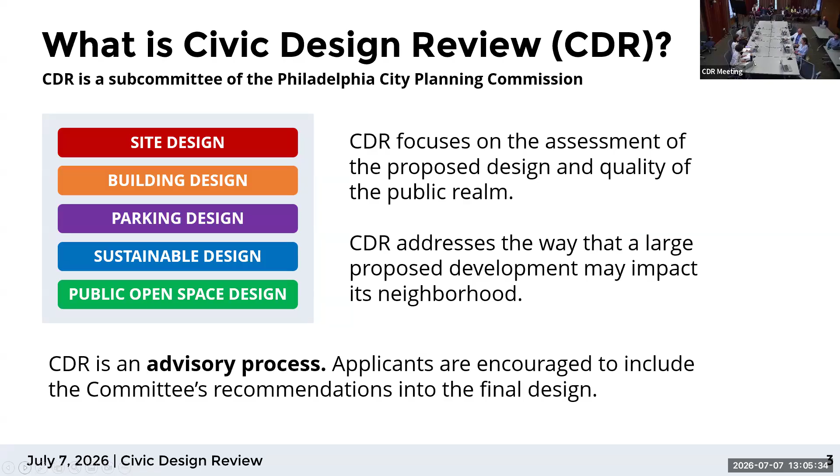The Civic Design Review Committee encourages and values participation during its meetings. Members of the public will have the opportunity to comment on agenda items during the meeting. Questions and comments will be heard during the public comment period, which will be opened and closed by the CDR committee chairperson. Public comments should focus on design-related issues only. When addressing the committee, please speak clearly and identify yourself by name and, if applicable, affiliation. A 2-minute time limit for public comments will be enforced by the committee chair and the meeting host.

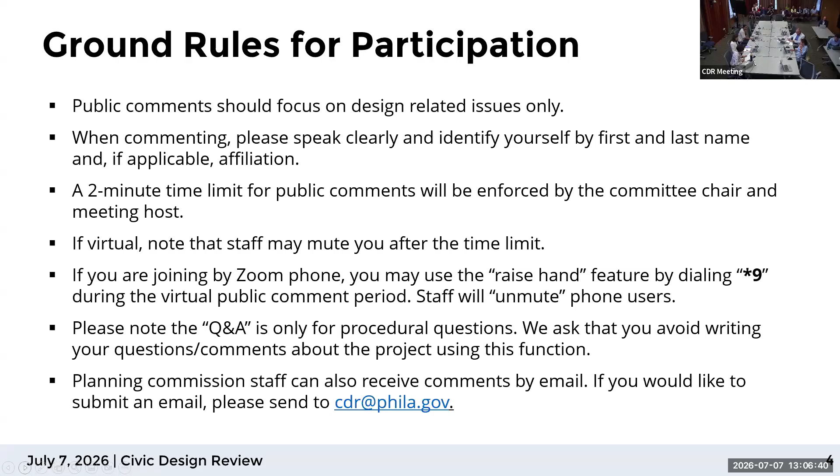If virtual, please use the raise hand function in the Zoom application and wait to be unmuted by the meeting host. If you're joining by Zoom phone, you may use the raise hand function by dialing *9 during the public comment period. Staff will unmute phone users. Please note that Q&A is for procedural questions only, and we ask that you avoid writing your questions and comments related to the projects using this function. Planning Commission staff can also receive comments by email. If you would like to submit an email, please send it to cdr@phila.gov.

First reviews will start with an applicant's design professional presentation limited to 10 minutes, followed by PCPC staff summary. Second reviews will start with PCPC staff analysis before the applicant's design professional presentation, limited to 5 minutes. Staff analysis will be based on the requirements of the zoning code and planning commission regulations, which will focus on site design, building design, parking design, sustainable design, and if applicable, public open space design.

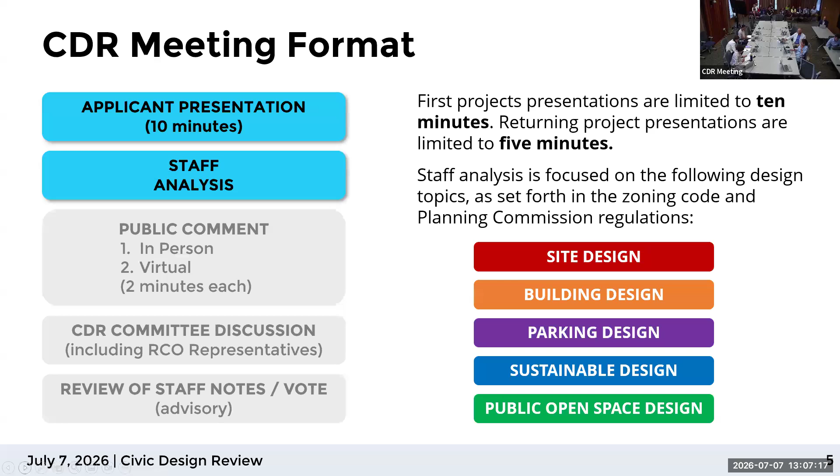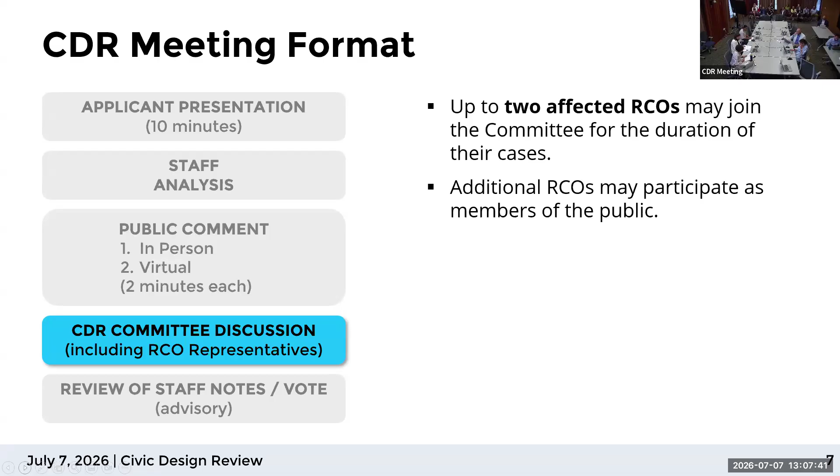Public comment will follow. Please do not restate the comments of your neighbors, and comments submitted in advance of the meeting will have been given to the committee and do not need to be read aloud. CDR committee discussion will follow the public comment period. Up to 2 affected RCOs may join the committee for the duration of their cases, and additional RCOs may participate as members of the public.

After the discussion, the staff will present notes taken during the meeting. The staff notes are for summary purposes only and not a word-for-word record of the conversation. The CDR committee will vote to adopt staff notes by unanimous consent and will also vote by roll call on whether or not a project needs to return for a second review. For roll call vote, I will ask the commissioners for their votes individually at the end of each agenda item.

The chair will now call the meeting to order and announce a quorum. Good afternoon, everyone. I am CDR Chair Jimena Vale. The Department of Licenses and Inspections has informed the City Planning Commission of 3 cases, 2 of which are coming for the first time. Cases may be heard more than one time. The committee may ask an applicant to return if, after discussion, significant issues are left unresolved.

Committee members, I'm going to call you one at a time. Please acknowledge your presence. Sarah Asheimer. I'm here. Clarissa Redding. Hello, I can hear you. I'm glad. Dan Garopalo. Present, thank you. Let's see. I think that is us for today. Yeah, thank you, I think. Mina? Yep.

And so we're going to begin with our first case, and that's 1527-47 Callowhill Street.

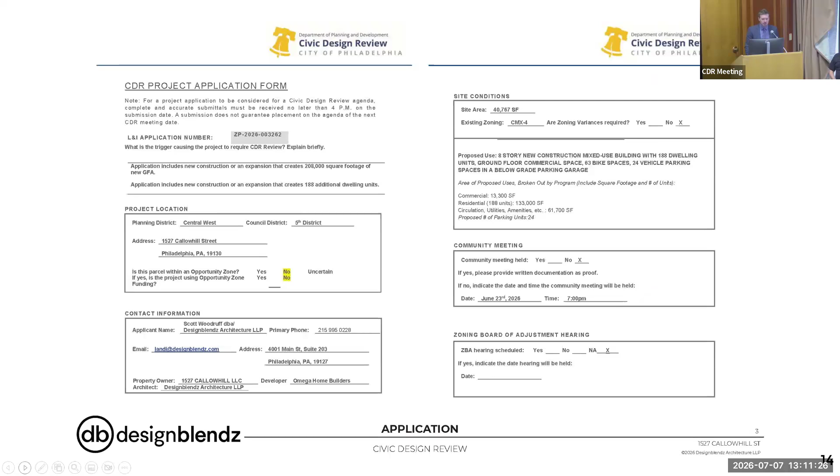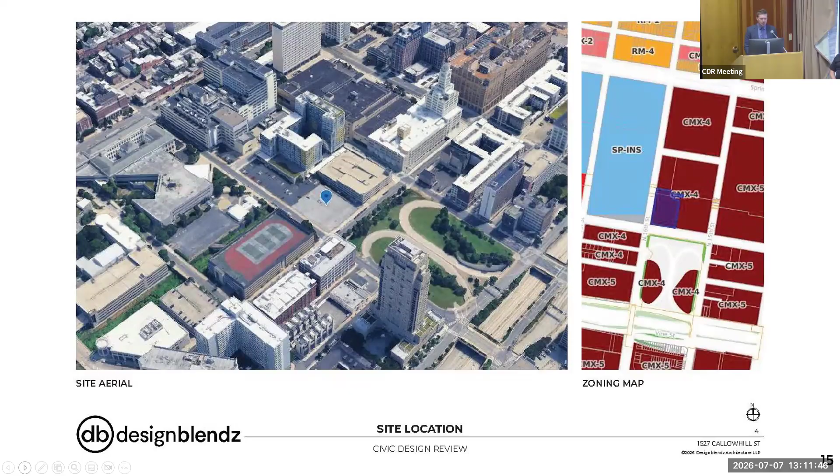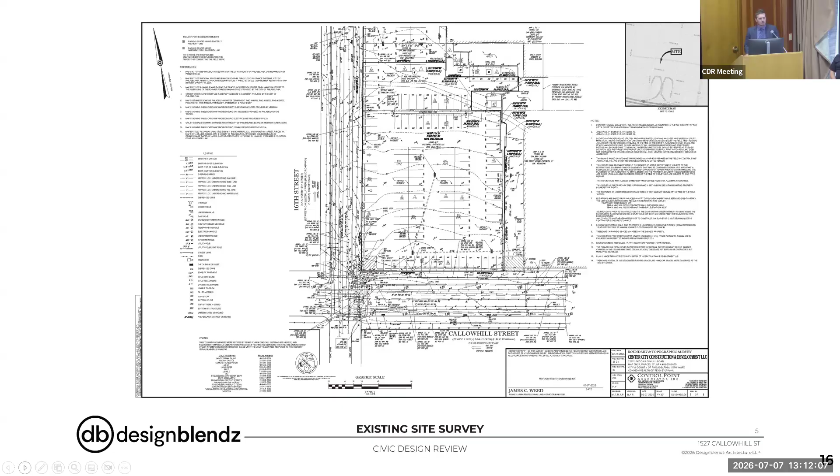Joe kind of walked through the program, so I'm not going to go over that. The site is an existing parking lot right north of the 676 turnaround, at 16th and Callowhill Street. There are 2 parking garages flanking either side of that, as well as a surface lot to the north side. Main thing I want to touch on here is the existing topography — we have about a 6 to 7 foot increase in slope going up 16th Street from Callowhill, which is fairly flat. And then we have the remnants of the old rail line that's depressed on the northern side of the site, cutting through.

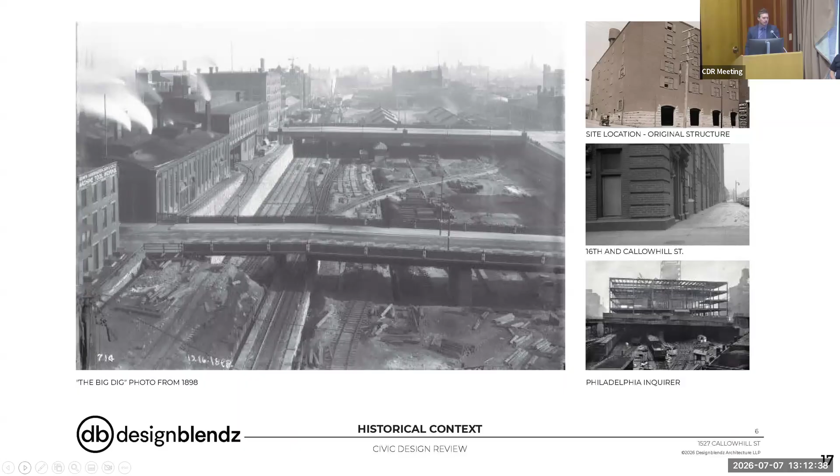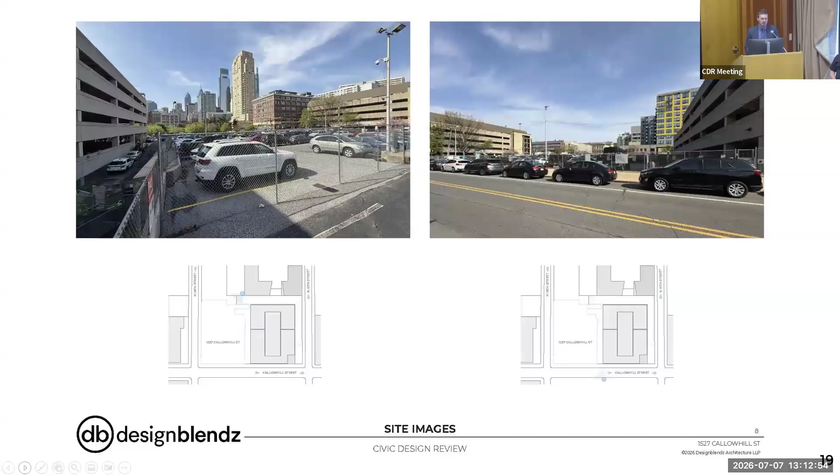Let's look at existing photos. You can see there's a newer multifamily building to the north side. Like I said, parking garages are seen flanking both sides of the site currently on Callowhill. And the Inquirer building can be seen in the background there on Broad Street.

Looking at the urban context and really understanding the figure ground of this area, there's really a giant void at this intersection where the site is, creating an unfriendly pedestrian intersection and urban experience. So it's important for us to hold the ground at that area, really push the facade, and create some sort of activation.

Looking at circulation, the main two accesses are Spring Garden and 676/Vine Street, running east to west, and Broad Street running north-south. 16th and 15th do get a fair amount of foot traffic and bike traffic. Community college has a large amount of driver traffic, and those parking garages have a lot of vehicles with people going to work around them. So there is a fair amount of activation that comes through this site — there's just nothing there to happen at the moment.

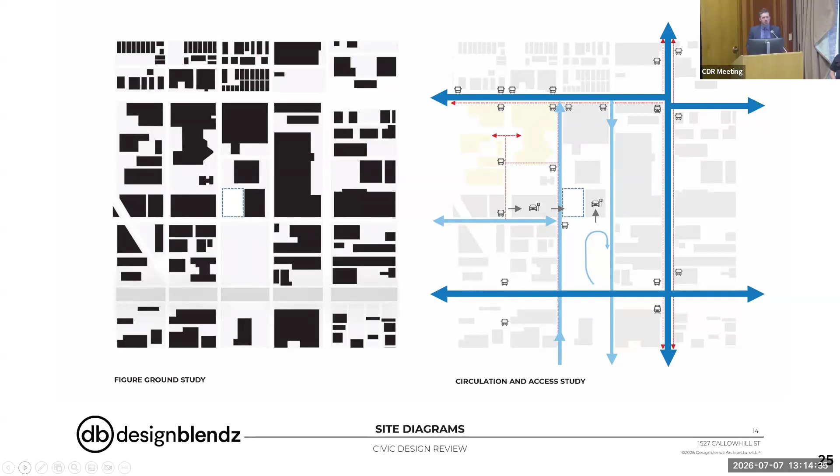When we started looking at form, the main driver was maintaining that urban fabric along the street frontages. We created some circulation around the building to the backside and the side there, cut a light and air void for the program to be relatable, and then pulled back one side to create a little bit more outdoor amenity and garden space for the residential program.

In developing this facade, it was important for us to create a pedestrian scale that was very walkable along the street frontages, creating a 3-story podium type structure relatable to human scale, and a structured rhythm that harmonizes with the existing industrial balance and facades in the area. We added a large amount of glazing at the bottom where the main commercial program is, relating back to more punched openings where the residential is above.

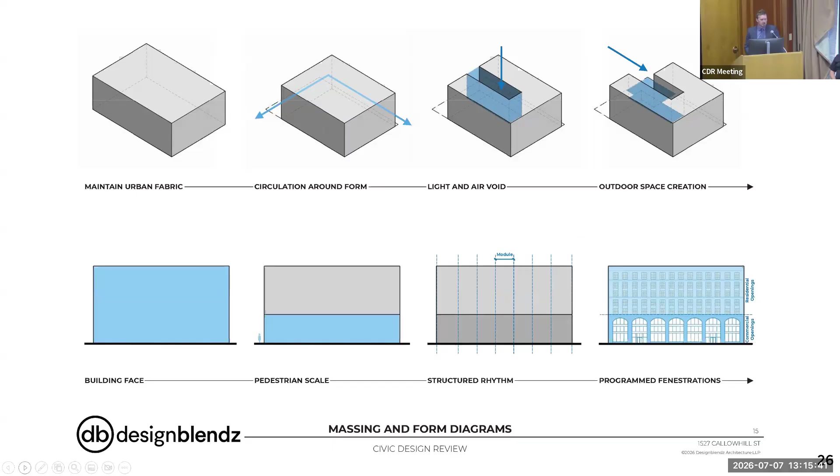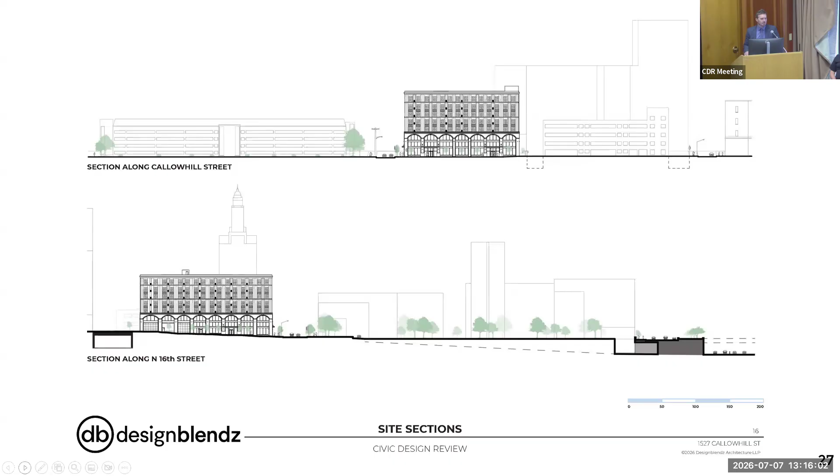Site sections - Callowhill is very flat, and you can see relationships to the garages popped up above those a bit. Up 16th Street, we have that ground plane that comes up, and the arch rhythm molds into the site quite well as it increases in grade there.

On the first floor, large commercial area - we tried to maximize this to the extent that we could. Commercial along Callowhill turning onto 16th Street will be double height space, which we'll look at in a second. Focus entries along Callowhill Street, and the resident lobby off of 16th, about halfway up.

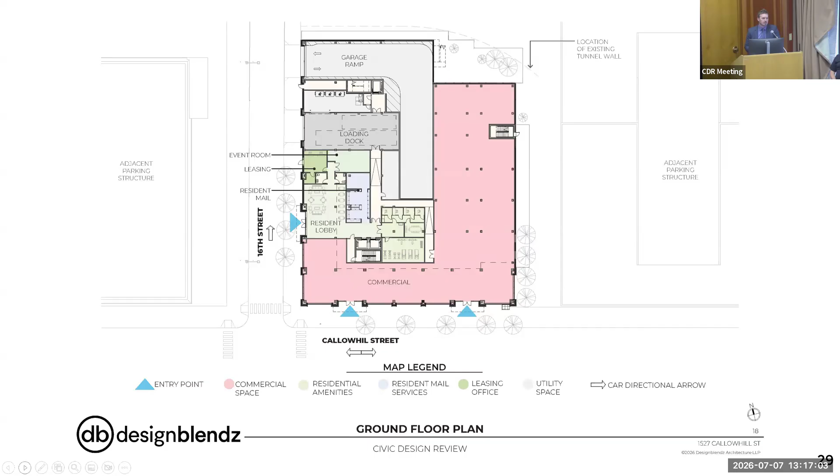All vehicular traffic was pushed to the north of the site, furthest away from the intersection. The top garage ramp goes to a subterranean basement, with a loading dock right south of it, direct access to a trash room for residents, and a back of house corridor for commercial, which they can also use as loading.

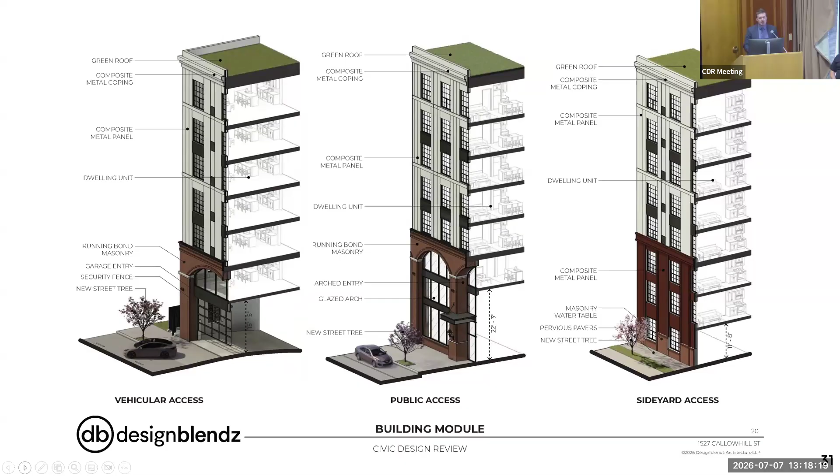It was really important for us to try and maintain as much flexibility as possible for that commercial tenant, whoever they may be, coming into the space.

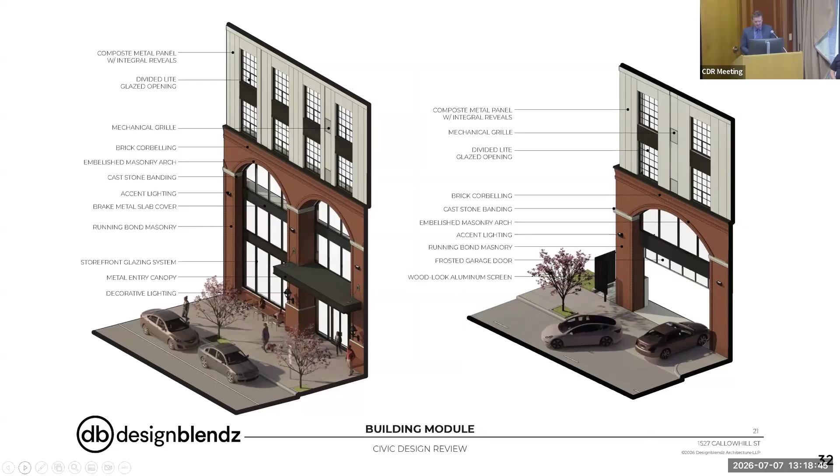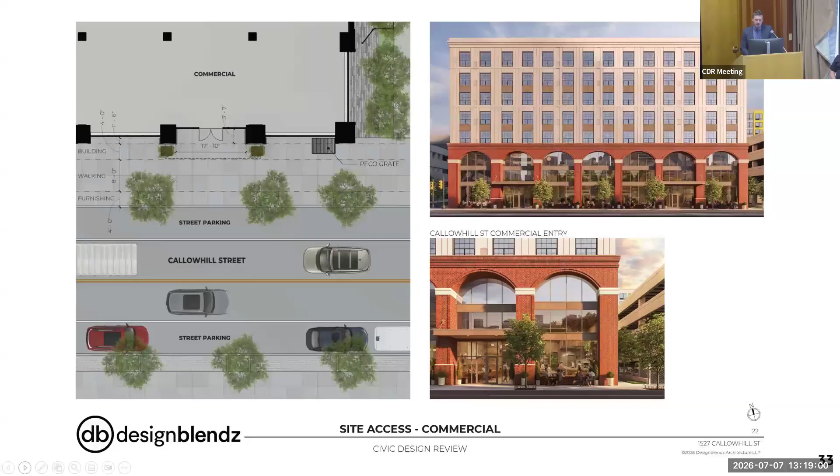One thing I'll mention here is the insets are 3'7" going into the entryways, still 1'6" at the other ones, again trying to allow the pedestrian to experience the building, pulling them into the building, if you will.

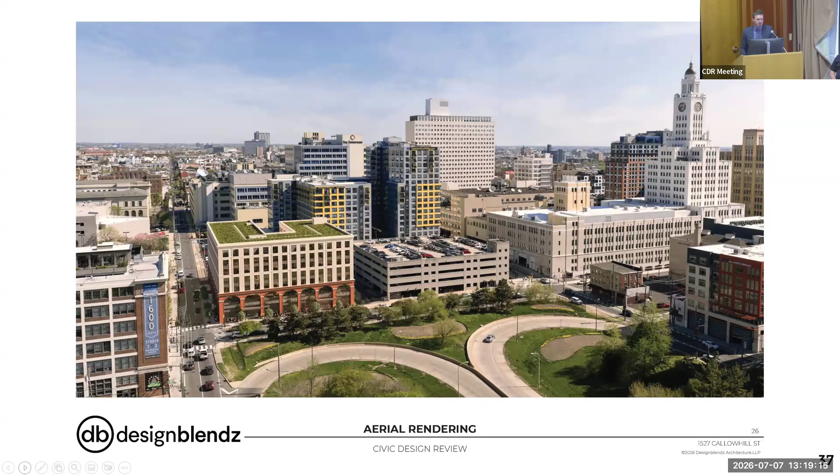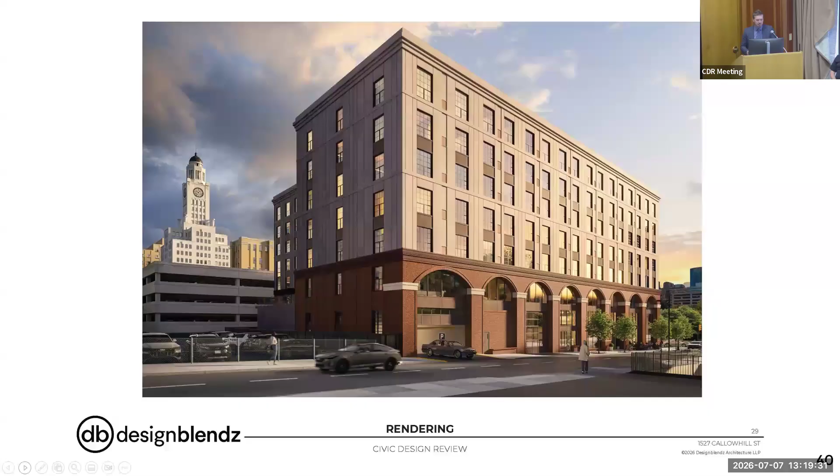Looking at materials of the building, the bottom 3 floors are brick articulated arches, with the top floor being metal panel, more of an off-white with a black infill. This tried to harmonize with the existing context - the Inquirer building and some of the other precast buildings in the area - so we play off those colors, both from a historical context and the existing surroundings. Around the middle of the building, the brick will transition to a red metal panel, still keeping the same idea as the front of the building, but with a different materiality over the parking garage and on the interior.

For the streetscape, we can go through the landscaping, but it's mainly street trees. We have a few trees towards the rear of the property, but most of the site is covered with green roof, which provides most of the infiltration given the building is mainly covered. I'll leave it right there.

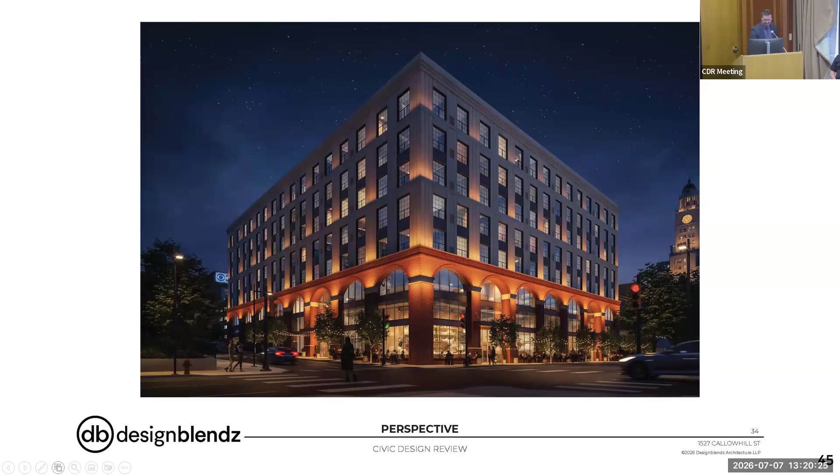Good afternoon. My name is Eliza Bauer. I'm with the Planning Commission, and I'm going to give the project overview.

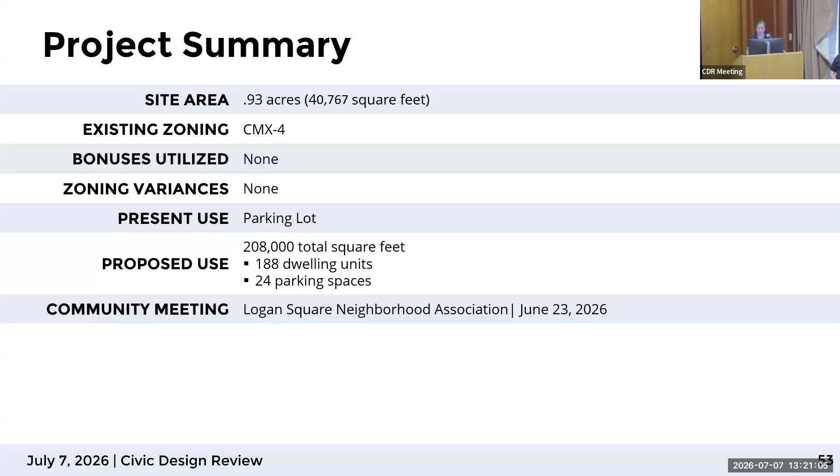The site area is a little under 1 acre. It's CMX 4. There's no bonuses being utilized or variances. The present use is a parking lot. It's a bit over 200,000 square feet, 188 dwelling units, 24 parking spaces, and there was a community meeting with the Logan Square Neighborhood Association on June 23rd.

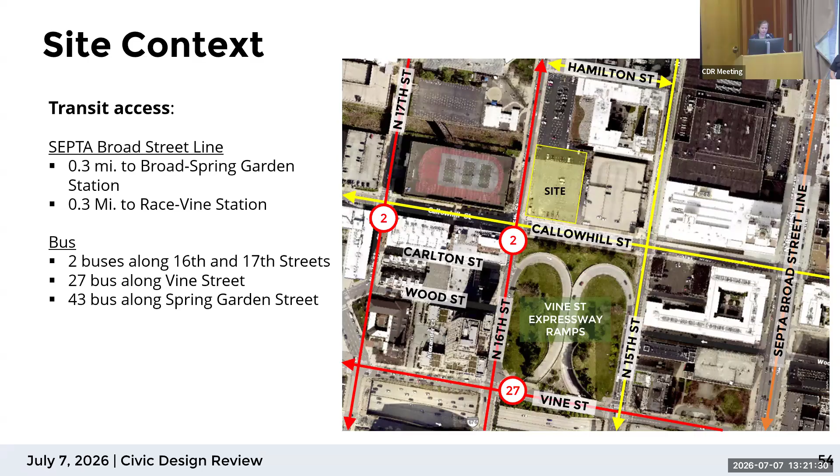So just a little more context about the site. It is pretty close to the SEPTA line, under half a mile, both the Spring Garden and the Race and Vine stations. There are a number of buses that go along the edges of the site, and it is very close to the Community College of Philadelphia.

Another thing we wanted to point out was the future rail park that will go into this cut area right north of the site. We just wanted to mention that we would like to see some connection between this site and the future rail park, or ways that the site could acknowledge that potential park.

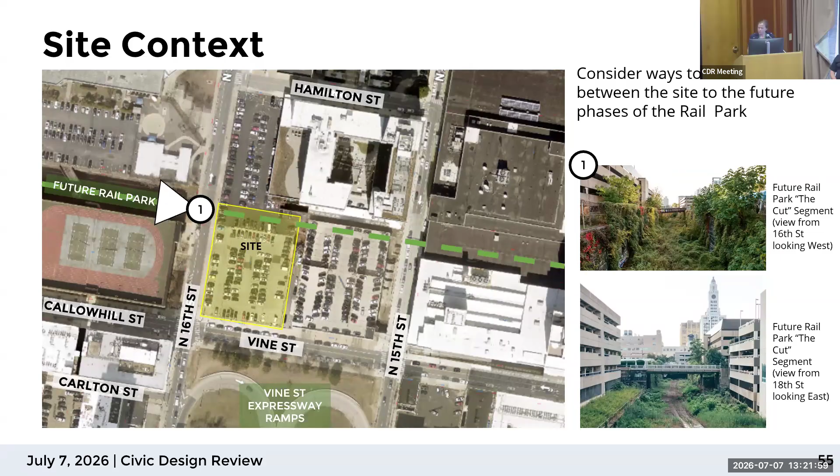For site design, staff appreciates the addition of street trees, outdoor bike racks, and distinct entrances for commercial and residential activities with associated marquees. We would like them to consider tree trenches with additional plantings to soften that streetscape a little more, especially along busier roads like Callowhill.

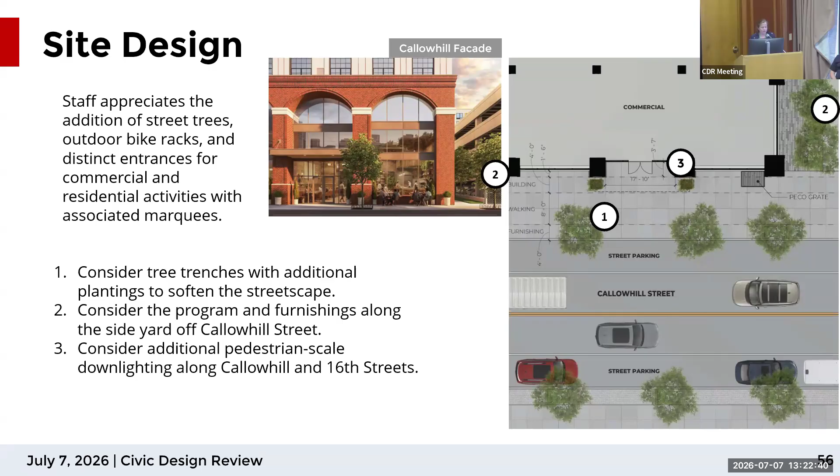Consider program and furnishing along the side yards of Callowhill. As you can see with the number 2 spot, there's kind of this alleyway, so we don't want it to become a trash or dog waste area. Consider additional pedestrian scale downlighting along Callowhill and 16th Street.

For the building design, staff appreciates the facade articulation with large windows, ground transparency, the entrance with marquees, and a mix of studio, 1, 2, and 3 bedroom units. Consider higher quality materials instead of the metal panel to ensure that proposed color is reflected accurately in renderings.

Based on the sample, it looks a lot whiter than the rendering is showing. And I know that you mentioned it's slightly off-white, but we just want to make sure it's consistent. Consider larger windows on the rear facade facing north.

For the parking design, staff appreciates the below-grade parking with one-way circulation and two-way driveway, and the interior loading zones off 16th Street.

But consider adding more loading zones on 16th and Callowhill for drop off and pickup and Amazon and all those types of delivery services.

Consider additional electric vehicle spaces and locate the charging spaces, and whether they'll be charger ready or have them already installed. Consider reducing parking to improve the vehicular circulation at the dead ends. It seems a little tight with a 3-point turn.

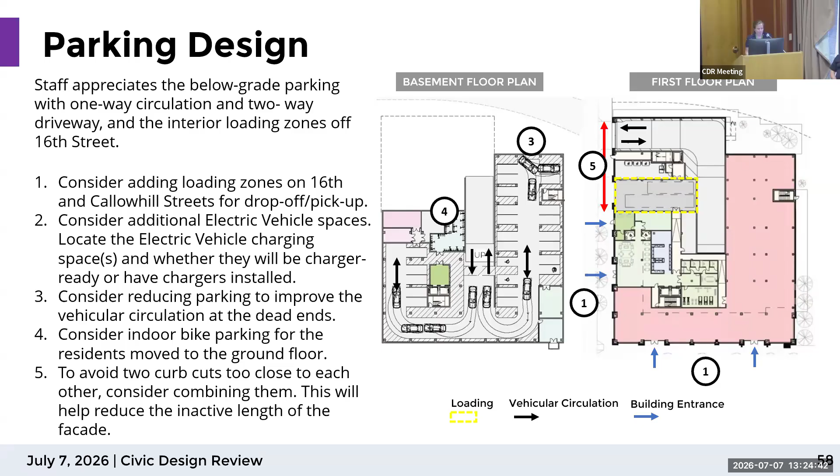You have the loading zone and the driveway right next to each other. Consider combining them, so this will reduce the inactive length of the facade.

For the sustainable design, add at least one additional EV parking space and identify where they are. Staff appreciates the intent to relocate the existing Indego bike station from 16th Street and encourages it to be reinstalled on site. Staff also appreciates the occupiable green roof, but consider adding some shading in that area. And that's it from us.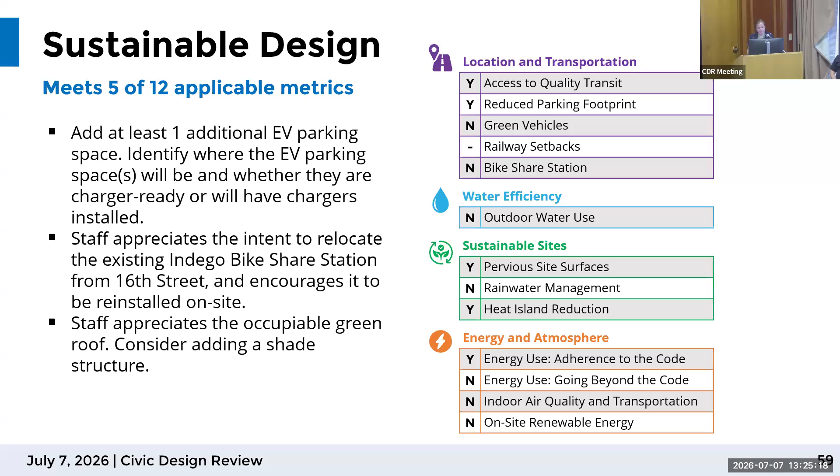Find a pretty picture to land on. There we go. Thanks very much, Eliza.

Do we have any comments from the public? I don't see any hands raised at this time. None here. No one here.

Committee members, any comments or questions? I think that this is a great project, and I wholeheartedly agree with all of your comments and recommendations. So, that's where I am.

I think kudos to everyone here. I'm glad you mentioned the future Rail Park. Hopefully that is a wild success and something amazing for Philadelphia. Maybe an extra door from the commercial space back onto that, if that's some signature restaurant with a patio on the rail park, that would be awesome.

But really nothing additional to add. I did pick up on the color question too, that bone white versus what the renderings show. What the renderings show looks fantastic, but that was a concern I picked up on too, though Eliza already mentioned it.

That's it. Great, thanks Sarah. Anyone else? I'll second that. I had the same thoughts. I'm very familiar with this site and still park there very often, but I think this area would benefit from something like this, which has more of an elevated feel than some of the other development in that area.

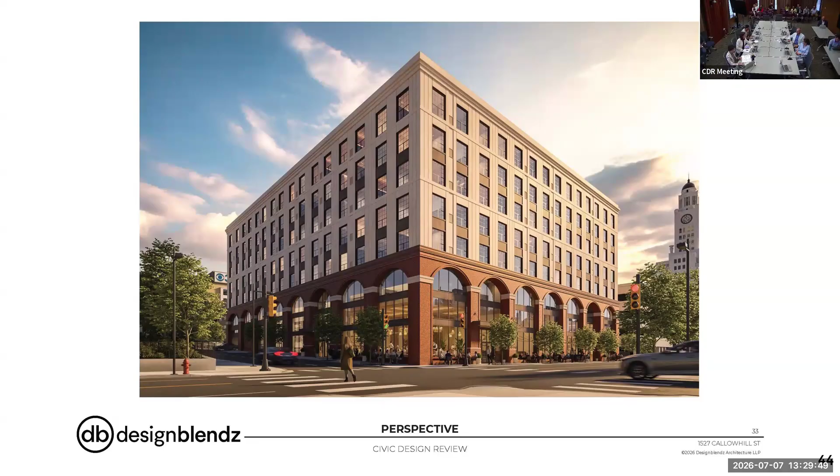Okay, I think we can review notes. Eliza, is that you? Who's got notes? Yep, okay, great, thank you.

Okay, very good. So our notes: this is a great project, improvement compared to some surrounding developments. Consider a door to the future rail park and making that connection, consider it as an amenity to the building. There are concerns with the bone white not being reflected in the rendering. In other words, we don't want to see the bone white. We'd like to see something that's more like what's reflected in the renderings, a little bit warmer and contextual.

The easiest time to add EV is now, so please consider that. And create some shade on the street for the future commercial spaces. And we are in agreement with all of the staff comments, and congratulations on a great project. Any corrections? Just to focus on building envelope issues, for energy.

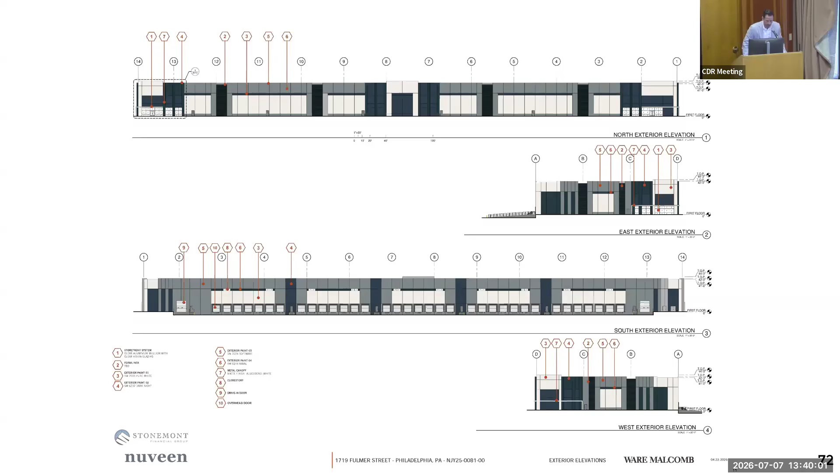The south side of the elevation has the dock doors, the loading doors, drive-in ramps, utility room, access doors, and sporadic fire department access doors as required by fire code. The south side also includes clerestory windows to provide daylight into the working area, the loading bay of the warehouse.

This gets into a little more detail on the materials of the building. The proposed perimeter would be precast insulated structural concrete panels with steel HSS tube columns and joist girders and steel joists holding up the roof structure. The panels would have a smooth finish with reveals, which are basically shadow lines cast into the panels, with a paint scheme as you see here on the elevations.

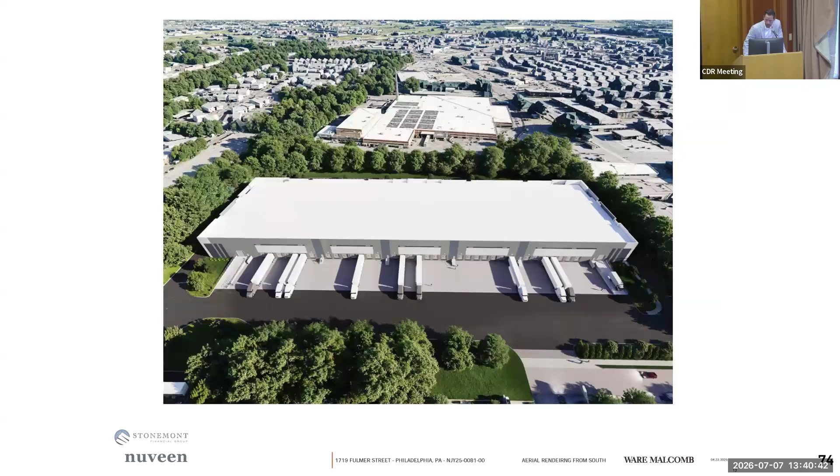The paint would be a medium texture coat paint. There's a few renderings here to wrap up the presentation.

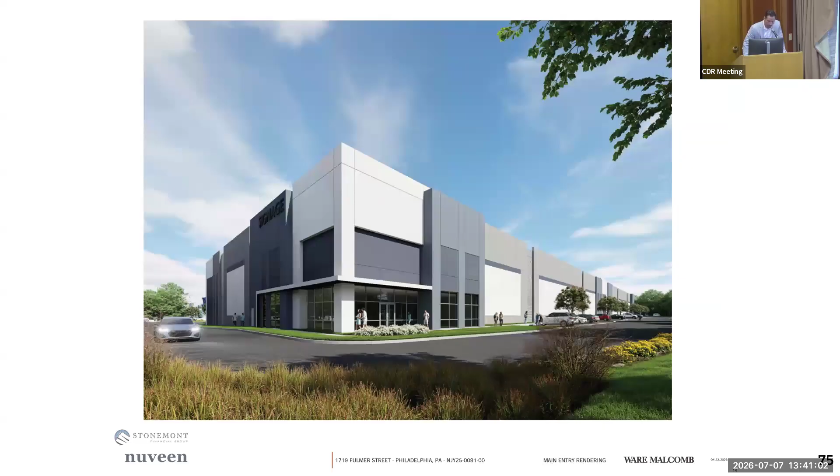This one will be taken above Fulmer Street, looking at the truck court and seeing the large industrial building beyond. To the left side, there's the rail line. I believe that's the West Trenton rail that goes through that side of the property, or along that side of the property.

This would be the northeast corner of the building, the office location. We tried to create shadow lines with recesses and pop-outs of the building's planes with the concrete panels, and accentuate the office entry areas.

This is the opposite corner where we've slid the office location and the windows down slightly down the facade to maintain the 3-hour rated fire separation.

This is a view from Fulmer Street looking in at the primary passenger auto entrance, and an aerial view from the northeast looking toward the building to show the front elevation and the neighborhood adjacent.

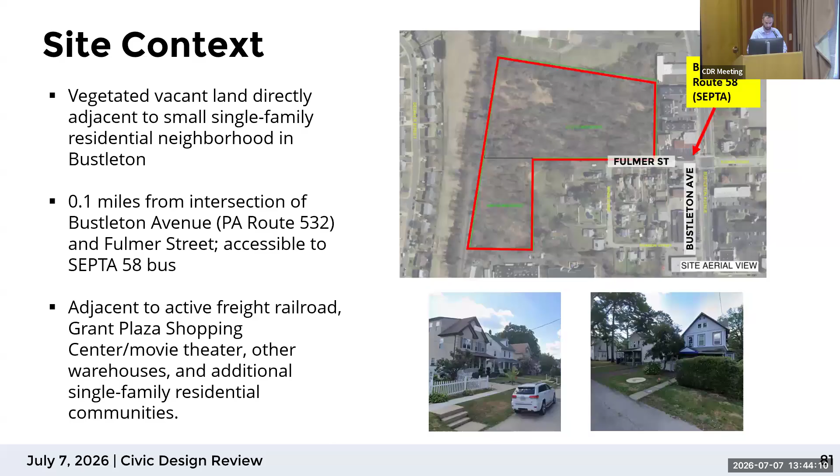For site design concerns, the Planning Commission wants to make sure the ingress and egress of the facility are evaluated. We want to ensure direct connection to Bustleton Avenue. We also recommend additional landscape buffer areas between the residential properties and the site's surface parking lot. We encourage more paths for pedestrian circulation through the parking lot, as well as around the water retention area, and potentially as far as Bustleton Avenue. Ultimately, this would improve safety and activate space throughout the entire site.

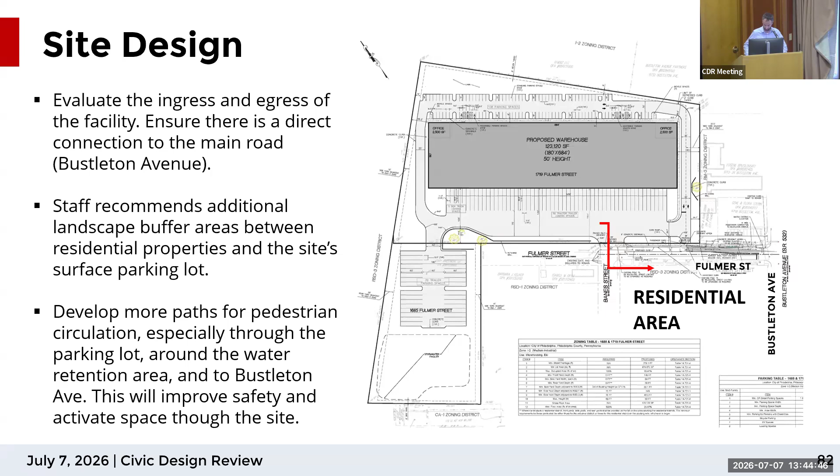As far as building design, we encourage adding transparency where possible and making the main building entrance clearer, perhaps through painting it a different color. In terms of parking design, we encourage reducing the amount of parking and adding more vegetation to reduce the heat island effect, as well as adding parking for EVs.

In terms of sustainable design, the proposal meets 5 of the 12 applicable metrics. We encourage that the project add solar panels as well as conserve as many trees as possible.

And now we'll make our way for the public comment period.

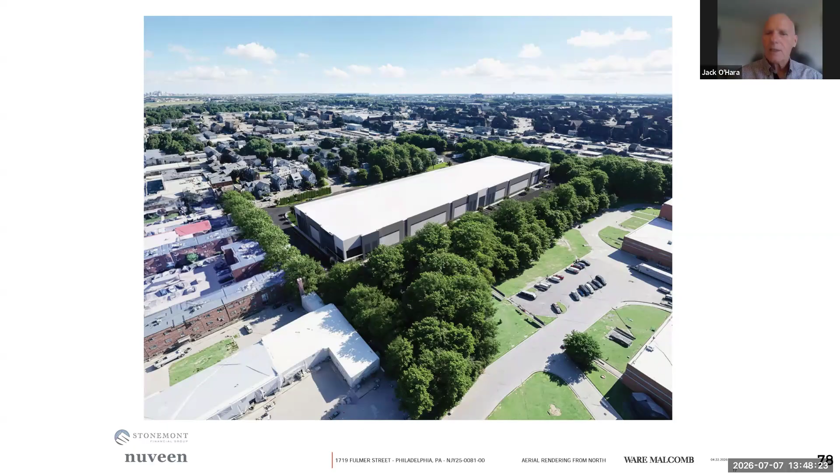And one of the recommendations that we sent down was that a second entrance could be made further down Fulmer. So a lot of the truck activity would occur inside the parcel and not on Fulmer in front of these 6 residential homes. So I don't know if I'm clear, but to take the traffic further down Fulmer, turn right into the parcel and let the trucks do their business, turning all inside the property and not outside the property. Again, for safety reasons, headlights and windows and things like that. We're trying to minimize the impact of this warehouse in this residential neighborhood.

Other than that, I know all these truck turning radius issues are going to be addressed. The plan does mention some very large trucks are expected there, and I'd like to confirm and make sure that does occur. But that's all I have. Thank you, thank you very much.

I know we also have Council District Representative Alice Udovich. Alice, would you like to speak? Hello everyone, Alice Udovich on behalf of Councilman Brian O'Neill. I attended that meeting that Jack mentioned, and I agree with all of his concerns as well, with as much buffering as possible to protect that residential neighborhood. Thank you.

Thank you. I did read the comments that came through from that meeting, and felt that they're really spot on, really good comments that offer good recommendations. That meeting having taken place at the end of May, would you be able to speak about why some of these comments have not been incorporated into the site, specifically a major change, the idea of flipping the development so that the trucks would be facing another warehouse rather than the residential. And then the comment that was just mentioned of moving the driveway, or potentially adding a second driveway.

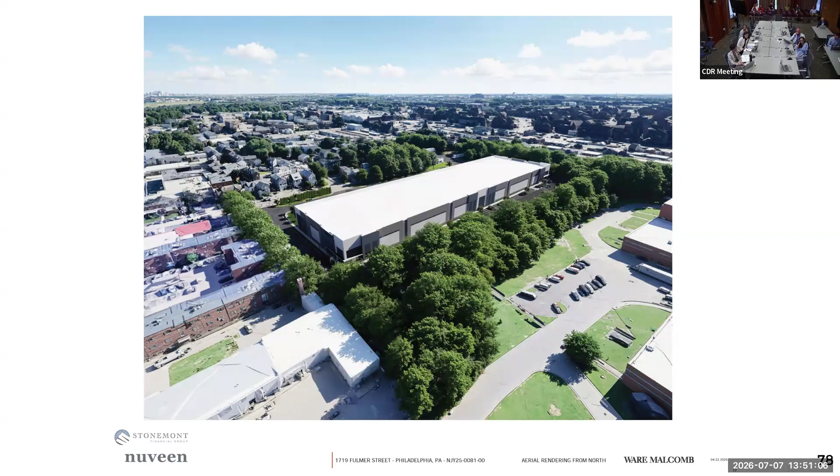I'm Brian Danahy, the developer for the project. Do you mind going back to the existing conditions page? This shows why we've chosen the layout we have.

The site slopes significantly from north to south. If you go to the survey before this, you can see it slopes significantly.

What we've done is put it as far away from the residence as possible. If you flip the building, there's about an additional 10 feet that raises that building, and it's slammed up against the property line, so those residents looking at the warehouse would be immediately positioned right on top of it with an additional 10 feet in elevation.

It also adds complexity in how trucks and cars are delineated on the property. So from a safety perspective and for minimal impact, we chose to flip it to the other side, using the existing grades to bury that warehouse as low as possible, and then use landscaping and features we've designed to help block that.

We've over-landscaped per code. We're open to suggestions on how to continue landscaping there, but we felt that was the best way to use the existing conditions and minimize the impact.

From a truck and logistics standpoint, it also matches the existing approvals that were in place. The 3-building development that was approved, which did not go through CDR, had the same orientation. The goal was to delineate trucks and cars as they go onto the property, which is why the two access points were put in place.

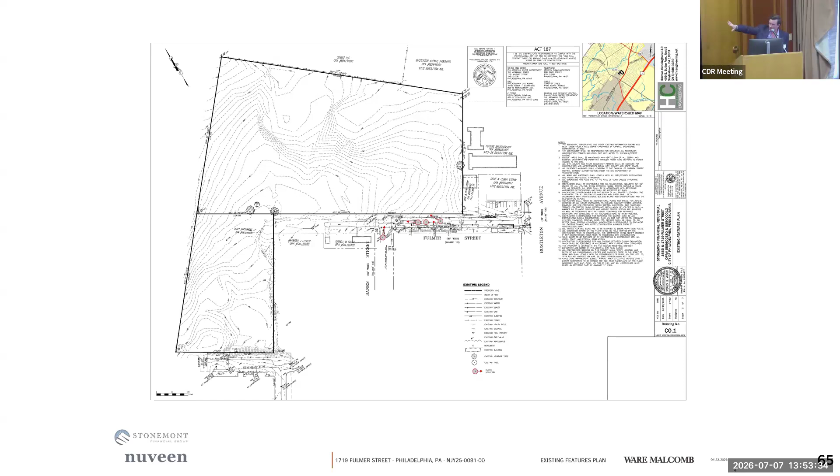Stormwater and truck parking would bring into play the car and truck crossover, which becomes an issue from a safety standpoint. Page 68.

Yeah, I guess this one shows it. So could you articulate that again?

So if you were to flip the building down, look at the bottom left, that's the truck parking lot. If you flip the building, the trucks exiting the property would have to cross where the pedestrians and cars are located.

So what we've done is put all truck traffic on the same side of the building. We've put the building as far north as possible to sink it, and put all the cars on the north and east end of the building, so it's perfectly delineated and flows without any crossover from a logistics and access standpoint.

Rob, if you're on with our civil team, do you want to explain any details that I'm missing there?

You can unmute now, can you hear me? We can, yeah. Hi, Rob Cunningham with Holmes Cunningham Engineering.

We looked into it, so Brian was a little mistaken. It's actually more like 15 feet of fall across the site. But when you flip the parking lot and provide a truck court or loading docks on the north side, it pushes the building about 65 feet closer to Fulmer Street than it sits today.

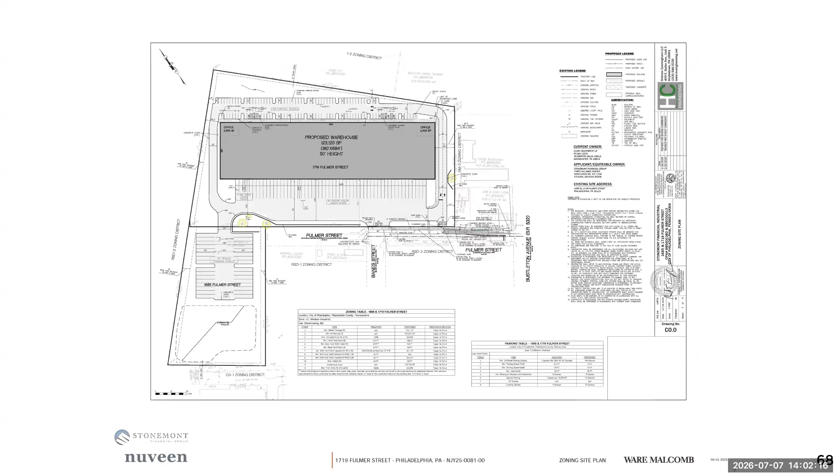Thank you. Any other public comment? I don't see any additional hands raised. Thank you. Committee members, any questions?

I just had a question. I believe north is up, but what is the property just north of this site? In the corner of the aerial, it sort of looks like an abandoned site. I have the same question. It's easier if you look at it — what's in the upper portion of that aerial image? If Lot Street were to continue, what is that property? What is that site?

That's an industrial property — the adjacent site is an industrial warehouse. I don't know their specific use, but it's an active warehouse. The property owner was also at the public meeting we had and spoke on behalf of the contamination issue and the past history of the property, including the denial of the previous residential proposal and the approval of the industrial project.

It's a challenging situation, and I definitely feel for the community members who just spoke, whose houses are very close to the entrance of the site. It does look like Fulmer Street is quite narrow with a very quiet residential character, and I understand how the trucks would have a huge impact and change that. There are obviously very limited points of access around the site. I wonder if the property to the north, being an industrial site with already existing truck access, could allow for some sort of MOU or easement for your trucks to use a portion of that site that already functions for vehicles. That could be a real way to be a steward of the neighbors impacted by this project.

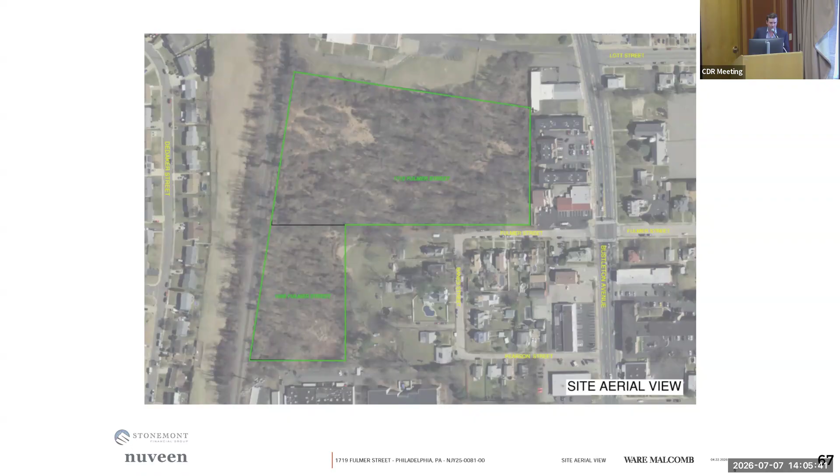Hello. So we've been working with streets. We had an approval for the previous iteration of the plan for one driveway that lined up with Baines.

We continue that. That is now just a truck access, and then we have that car access, which is closer to Bustleton. One issue streets had was ensuring that truck traffic wouldn't conflict with parking on the south side of Fulmer. So we're doing significant widening on our side without impacting the south side of Fulmer, so trucks can pass along Fulmer or cars can access it without having to pull over. It was streets' recommendation to line up with Baines as opposed to continuing down Fulmer into the site. We've been working through that process with streets and will continue to do that, but that was the layout we got our initial phase approval with.

Rob, can you just emphasize or go through the existing width of the street and what we're going to expand it to? I don't necessarily think that's necessary.

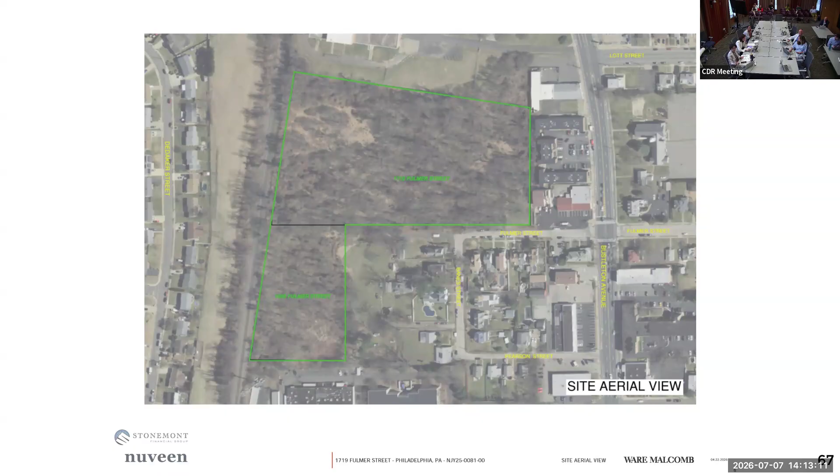I also wonder if there's opportunity for more vegetation and buffer along Fulmer Street if the building maybe was canted to follow the north property line, so it could push a little further north and away from the residents, providing just a bit more buffer. But I do sympathize with the trucks being in such close proximity to those residents.

Yeah, I would really encourage as a next step maybe some additional iterations with community members. I would really lean on them for advice in terms of the entrance location, because I do think that the entrance being so close to the houses will have a big impact in terms of the noise and the lighting.

I would imagine there are additional opportunities to increase the width of the buffer at the southern end. If you are moving a lot of soil and earth, there could be additional measures such as regrading and creating a little hill on the north side of Fulmer Street to block noise and light. You either need a wall or a mound of earth.

And so there could be additional mitigation measures to help lessen the noise and light pollution. Also, I zoomed in really carefully on that landscape plan and noted the size of the trees that are going to be installed are all 2-inch caliper or less. Those are really tiny trees. So to make a bigger, better impact on day one for those neighbors, installing larger plant material strategically near neighbors would be great.

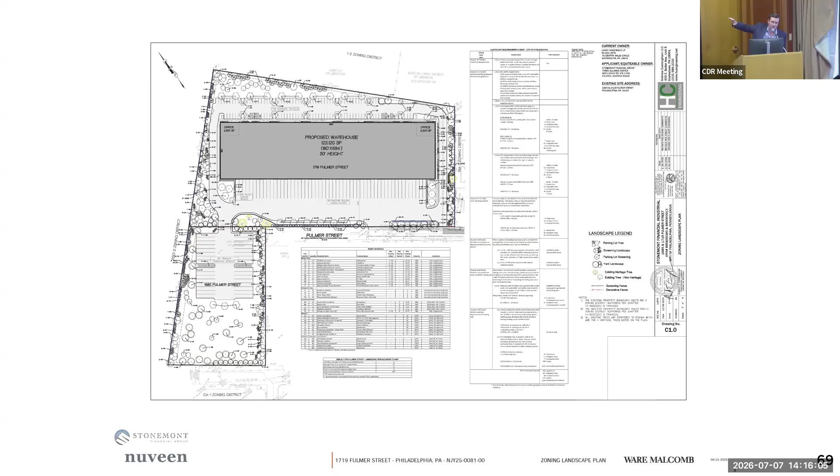Just from a limitation standpoint, what you'll see is there are legacy trees on the property that can't be touched. So some of these areas, like where the pavement bulbs on the left, that's all legacy trees. Similarly, on the property line to the east, there are legacy trees that can't be touched. So that played into how we picked our access points, and that was coordinated with streets as well.

Got it. And I love trees—I appreciate legacy trees and I love trees, and I know lots of people love trees. But in this situation, there might be an argument for, sadly, removing some of the legacy trees to better buffer some of these neighbors. And maybe that's never ideal, but could be worth exploring.

I'll just try and make a couple comments. This is Civic Design Review Committee, so our job is to speak on behalf of civic design. This isn't a highlight project in terms of civic design.

Warehouse distribution centers are part of modern life. My family gets packages, we get meals delivered, et cetera. But what do you need for a warehouse project? You need a big flat piece of land and good road access, and you don't have good road access here. So you're really handicapped.

The solution you're forced into is driving - there's 40 truck docks on the south side - driving 40 18-wheelers past a community's largest asset, the biggest investment they'll ever make. If this happened to my block, I'd be devastated. You can hear the distress in the people that are calling in.

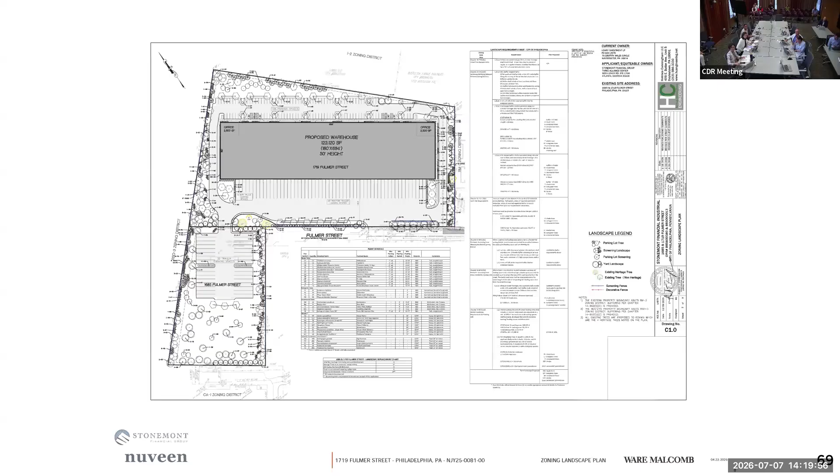We had some comments from the RCO and from council. RCO suggested the summary is spot on, and would like to minimize the impact of the warehouse property on the residential neighborhood. We heard that the site sits across from 6 residential homes. The parcel has been cleared for some time, just acknowledging the transformations the neighbors have gone through in this location. We ask that you recognize the loss of the open area, and I think that might speak again to what can be done to give something back.

The RCO would like to ensure that the warehouse can coexist in a residential area. There was a summary provided via letter of the May 27th meeting, showing concerns of the traffic flow within the site - to consider a second entrance further down Fulmer so truck activity could be inside the property, not on Fulmer in front of the homes, and queuing. Concern about large trucks expected there.

Council agrees with all of the RCO's concerns and would like to have as much buffering as possible to protect the residential neighborhood.

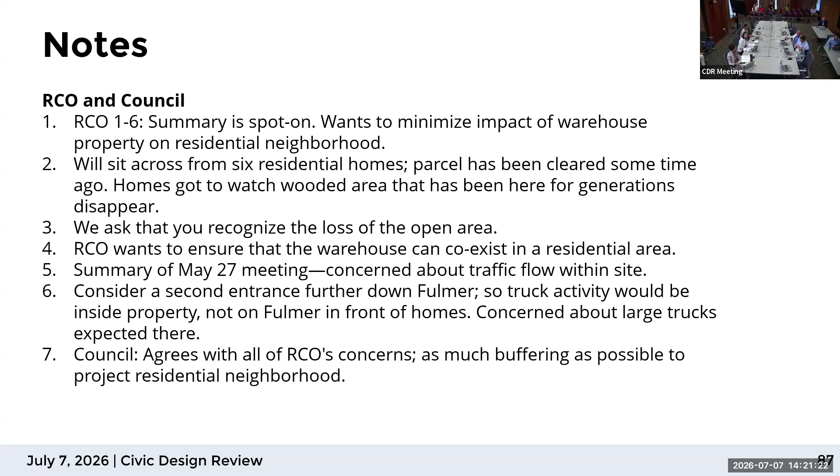Notes from the committee: we're concerned about the slope, the elevation and the grades - about the property just north of the site. I don't know what that first sentence is intended to suggest. I think what I'd like to say is to modify that first sentence to say that we encourage continued conversation with the owners of the property north of the site, which would be a better access point.

We empathize with the community members who expressed concern about reduced parking and increased traffic. Could there be an MOU for trucks using a portion of the existing industrial site to the north? This way the development could be supportive of neighbors' needs - might be the only alternative. That's supporting number 1.

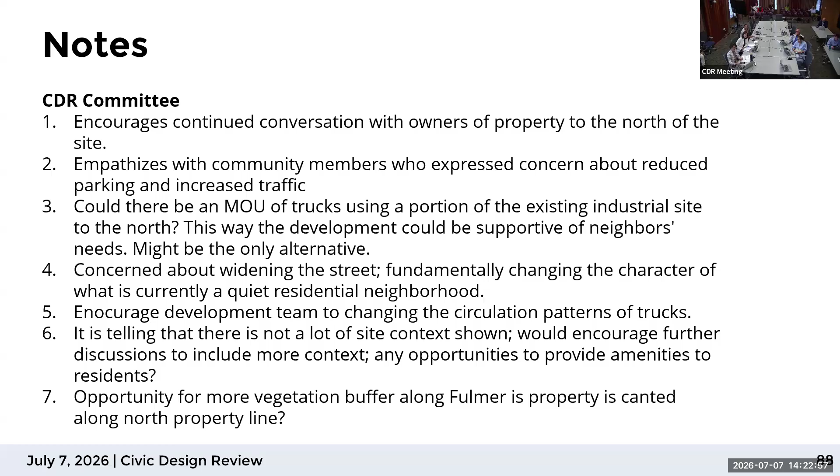Concern about widening the street, fundamentally changing the character of what is currently a quiet residential neighborhood. Thinking about maybe changing the circulation patterns of trucks - encourage the development team to change the circulation patterns of trucks to prevent idling, the sound, the lights. What I heard is most of the concerns are around those kinds of implications for the community. Opportunity for more vegetation to buffer along Fulmer.

Help me with number 7. Clarissa, is that your comment? Opportunity for more vegetation buffer along Fulmer, as property canted along north property line. You meant to say consider canting the building to create more space along the side of Fulmer Street for a larger buffer.

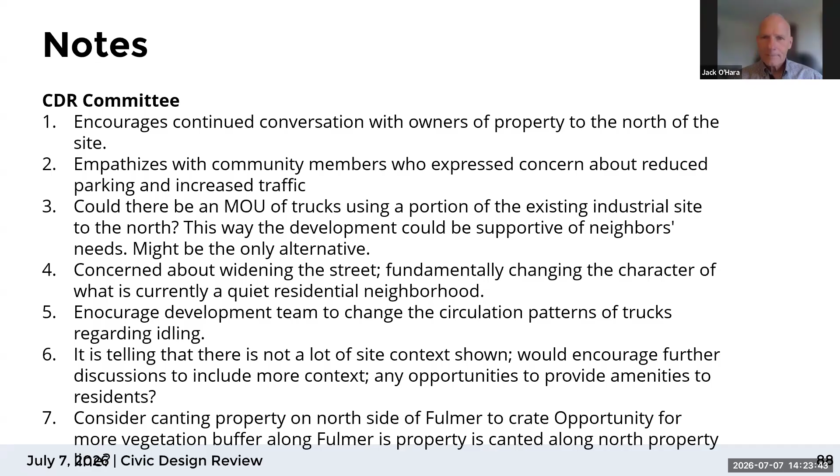I don't know if these capture the spirit of our conversation, team. There's more: we encourage additional conversation with community members, maybe an increased width of buffer at the southern end of the property. Consider regrading and creating a hill, mound, or wall on the north side of Fulmer to mitigate noise and light pollution.

Concerned that the trees installed are very tiny, could consider adding larger plant material, maybe add a community amenity like a walking path, for example. If the northern warehouse neighbor will not collaborate, maybe partner with neighbors in the residential area to do what?

My suggestion was, if that northern neighbor is not willing to collaborate, I would iterate and test some of these alternative design solutions in collaboration with the community, because I think we're all, including you, very sensitive to them being there. And I think there are trade-offs and pros and cons associated with the various alternatives, so exploring those to the greatest extent with the neighbors is something I would recommend.

Okay, and then we have a concern about the access overall. If you have to proceed with the project, it would be beneficial to ameliorate the impacts based on these suggestions. Maybe encourage these suggestions to improve the project. Just delete that one. Number 7, yeah, I don't think it's helpful.

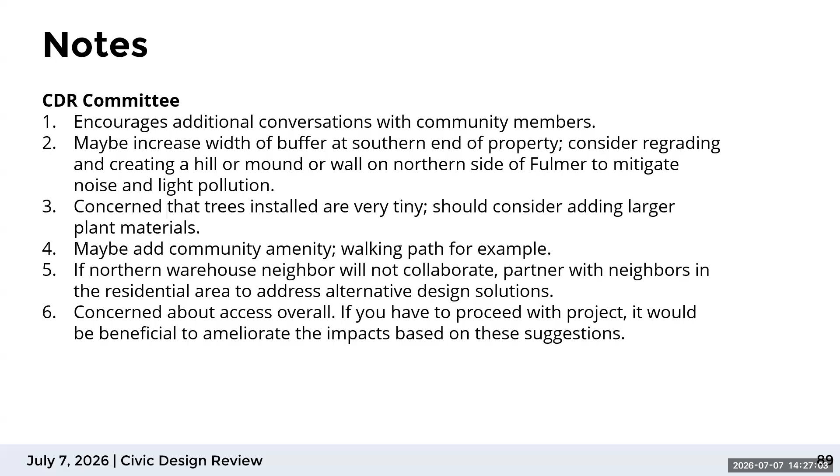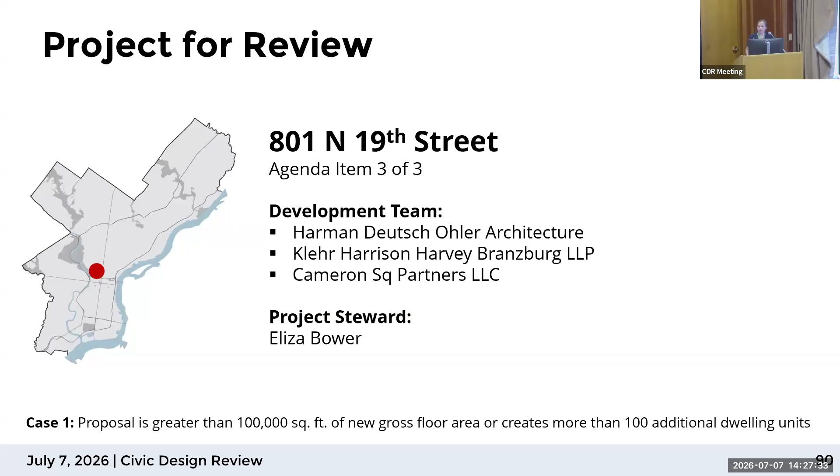Okay, we're going to move on to the third and final case, 801 North 19th Street, which is coming to us for the second time. Good afternoon again. I'm going to give a brief overview of the project to go over comments from last time, and then the applicant will go through the presentation again. So this is 801 North 19th Street. We saw it last month in June, and I will give a brief overview.

So the area is half an acre. It's zoned RMX3, no bonuses, no variances. Currently it's a vacant lot. It's 111,116 total square feet, 110 dwelling units, 49 parking spaces. United Francisville Civic Association had a meeting with the applicant on May 13th, 2026.

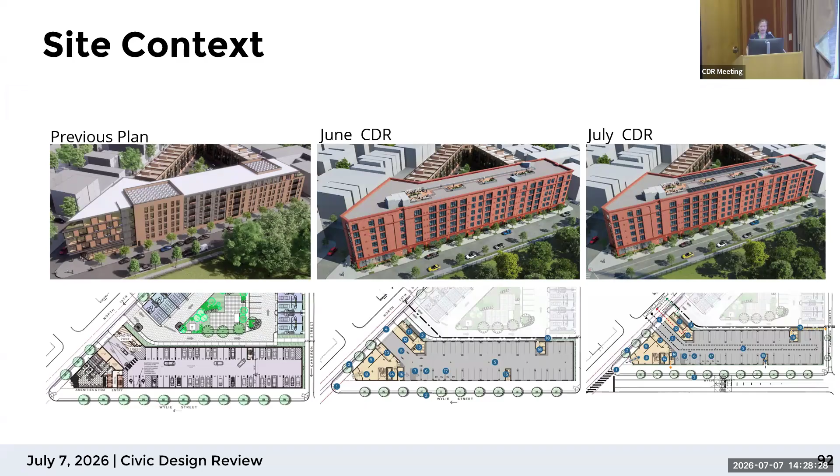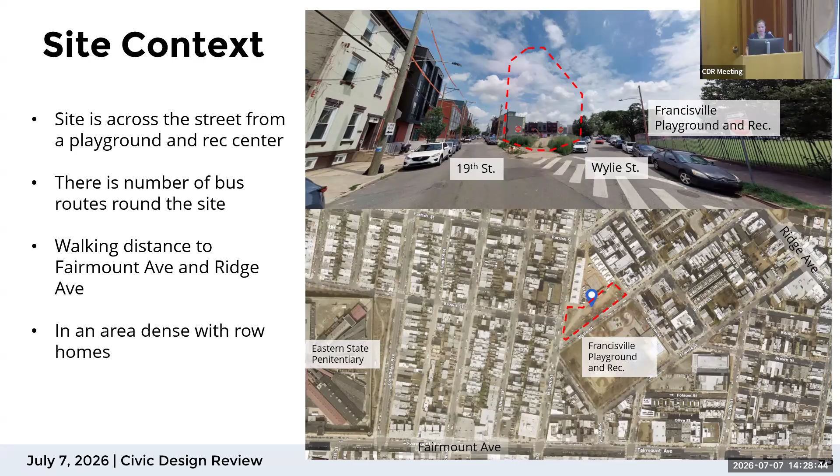So just a reminder, we previously saw this site in 2021. They came back to the June CDR, and on the far right is the plan they are presenting for July. Just a little context: the site is across the street from a playground and rec center. There are a number of bus routes in the area, it's walking distance from Fairmount and Ridge Avenues, and it's in a dense area with a lot of row homes.

So we're just going to go over some findings from the first review. We had four comments for site design: creating larger continuous tree pits to mimic the feeling of the park across the street and soften the building's edge, share the driveway with the adjacent lot, reconsider the circulation of the ground floor, and connect it to the loading in the main lobby.

None of these were changed from June to July.

For building design, the blunt edge on the corner feels awkward and the asymmetry doesn't work. Consider ways to make the corner more of a statement piece. Would like to see a double floor lobby.

Wylie Street facade could benefit from some changes in colors or materiality. The additional height of the garage is a detriment to the pedestrian experience.

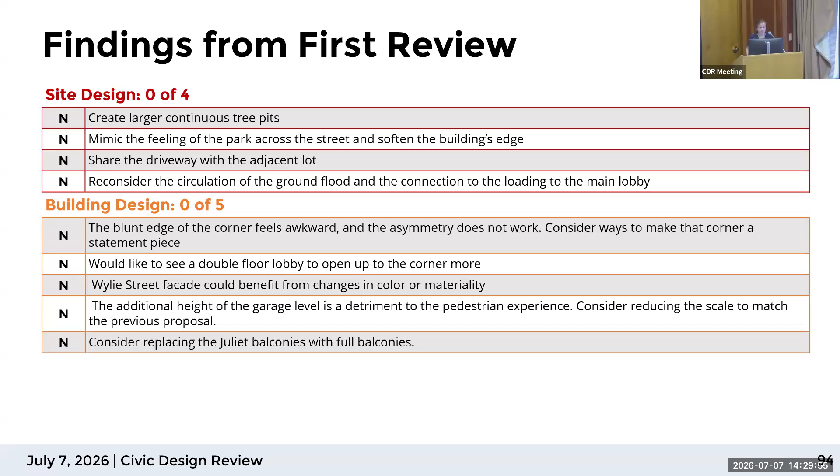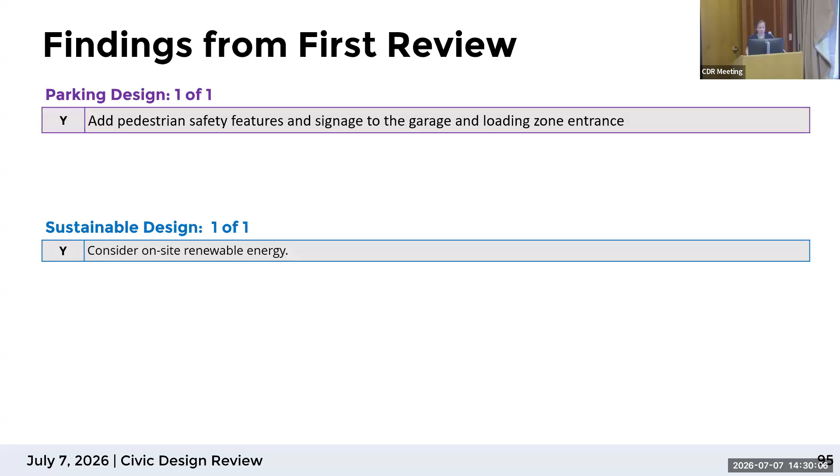For the parking, add pedestrian safety features and signage to the garage and loading zones. There have been changes to that. And then consider renewable energy. There have been changes to that.

So just a little overview. Staff recommends reconsidering the ground floor circulation. The interior loading zone does not have direct access to the mailroom, lobby, or elevators, creating a complicated circulation,

especially if there's package drop off and pickup. Move the exterior loading closer to the lobby. Once again, this might create an easier access for people who are dropping off packages, picking up people, etc.

And then also consider moving the bike room to the main entrance. Right now, it is closer to the driveway of the adjacent parcel.

Add amenities to the public space in front of the lobby to activate it. In that triangle area in front of the lobby, there's potential for some zhuzhing up.

For the building design, retool the layout of the corner units to allow for windows to be centered or have larger windows. Because right now, the corner has a bathroom that would be on that corner facade.

The main entrance doesn't go far enough in making a statement or feeling welcoming. We would still like to see that larger lobby in that area. Staff appreciates the balconies, but once again, we would like to see it go further with full balconies.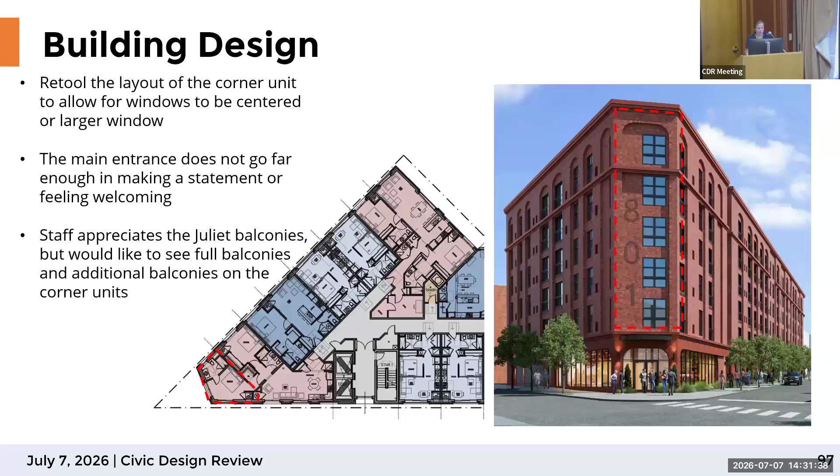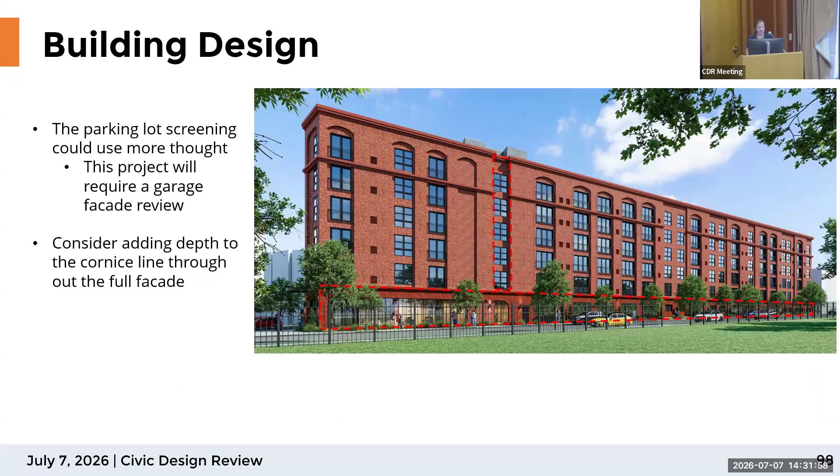Once again, for the building design, the parking lot screening could use a little more thought. This project will require a garage facade review, so that will have further consideration. And then consider adding depth throughout the cornice line.

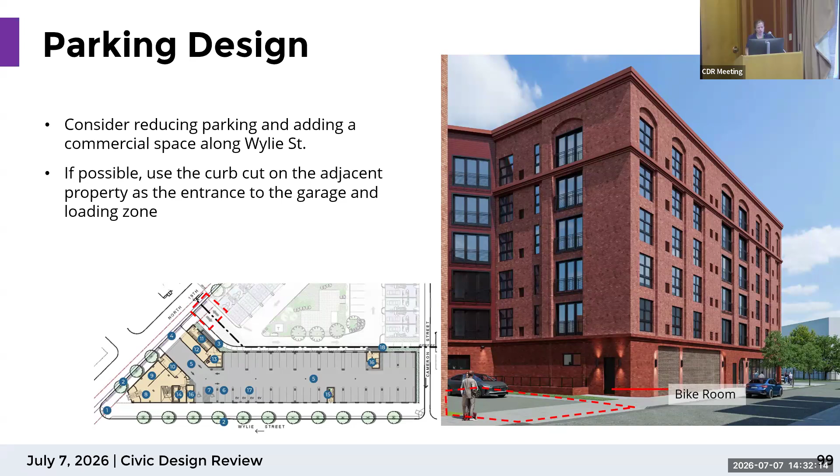For the parking design, consider reducing the parking and adding commercial space along Wylie Street. And if possible, we still encourage using the adjacent property's curb cut so that we can reduce the number of curb cuts in this area.

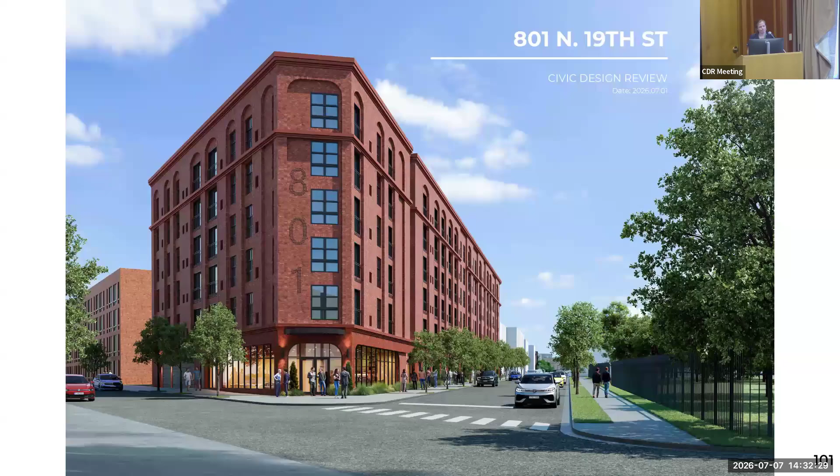Hi, Rustin Oler, Norman Deutsch Oler Architecture. So I'll just do a brief summary and then I'll go through the changes that we made.

So this is our second time back at civic design review for the redesign. The property originally came here in 2021. We were not the architect and it was under different ownership. This is unique in that the property does have a building permit and is actively under construction, so I'm very limited in what I inherited that I can change on the ground floor.

Since the last meeting, I personally spoke to the development team of the townhome sites to the north of us. Those townhomes are actively under construction. It is owned by 2 separate individuals and 2 separate development teams because it got sold off on 2 separate street sides, and they have conformed HOA documents and are actively for sale, and we have no ability to access that property in any way.

The majority of the designs that came from the new ownership and changes resulted from some of their personal preferences, as well as a lot of community feedback when it went through in 2021. A lot of criticism that it got at the time from CDR and from the neighbors was a reduction in unit count, increase in unit sizes, and increase in parking. Almost every change that we made was in direct response to that.

So while we did infill the bookends at the top floor on each side, which previously had covered terrace decks at the end, to increase the GFA, it was done in order to increase all the unit sizes throughout the building. At the same time, we decreased the number of units from 115 to 110. So while I understand our massing is different on the ends than the original 2021 presentation, it was done with the intent of decreasing units and increasing unit size.

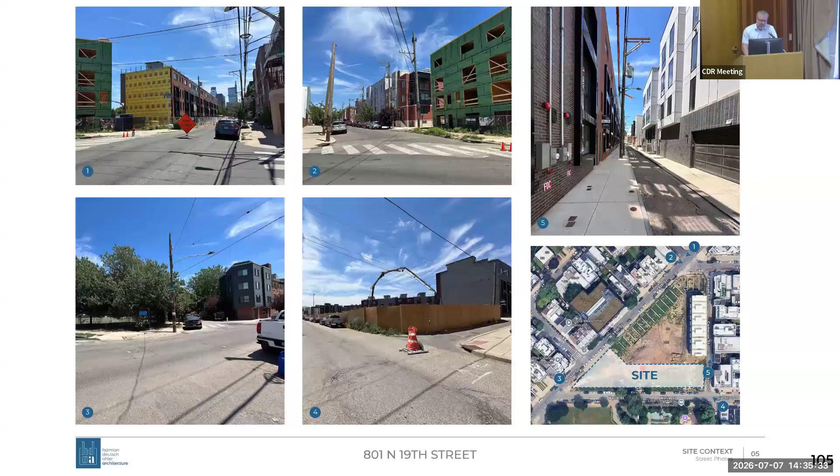I'll just use a couple more minutes since it's a reduced time. I'm just going to get to some of the second changes in the presentation. We did add solar panels.

We did also go back to the RCO to address some of their current concerns. The largest concern they had was noise from the roof deck. The roof deck has been designed to be centered into the building so that nobody can get near the edge. It's also broken up into 4 separate pockets, so you don't have a large congregation of people in any one section. There's no way for anybody to get near the edge, which should address their concerns about sound from the roof deck, since the previous version from '21 did not have a roof deck.

Let me get to some of the other changes. Continuing along the grade, so you can see - while we did raise the building, and it is a full 6 floors now at the primary corner, there's a significant 6-foot grade change over the site, so we're 5.5 stories on the end.

Understanding we will have to go through city garage screening planning review, we kept the current screens for now. We'll work with city planning on what the screens are made out of, and then we have the building setback and planters at each screen.

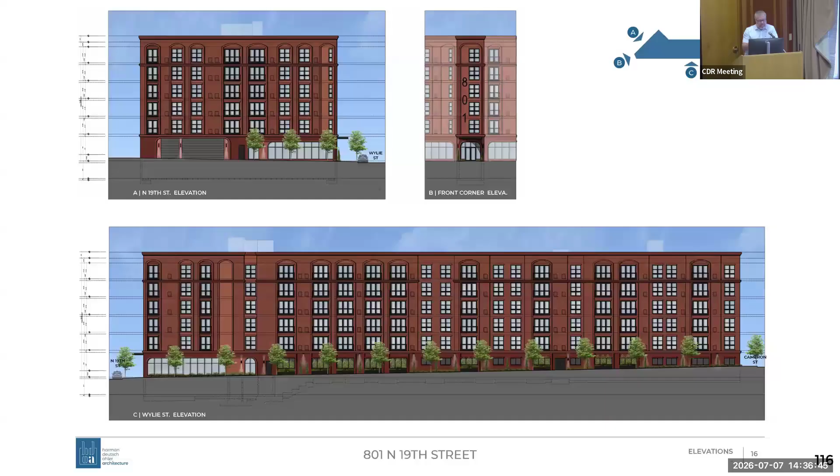So we have vegetative plantings at the streetscape. We did look at increasing the tree pits - we've increased them from the previous streets approval. In our design they're the same location, but they're I think 3 by 6 or 9 feet now. We'll continue to work with the streets department to see if we can elongate those as much as possible. There's a continuous grass strip at the park across the street that they don't actually allow us to do without a city council ordinance, but we'll see what we can do to increase the size of the tree pits.

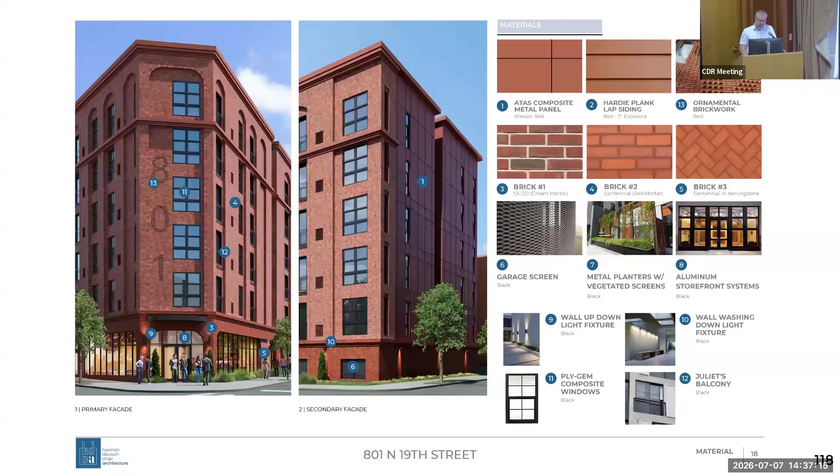To be honest, that's the majority of the changes.

Thank you very much. I really appreciate you taking the time to explain some of the context and the outreach you did since we last met. I think there's no vote today - the project will go on. It's just if we had any final comments.

Echoing what you said, it's great to see solar panels being planned from the very start instead of a vague promise to consider it in the future. The challenge of this project is the ground floor, but this is a handsome facade overlooking the park. I wasn't here last time, so everything's new for me - that's all my comments.

Good. Thank you. Appreciate it.

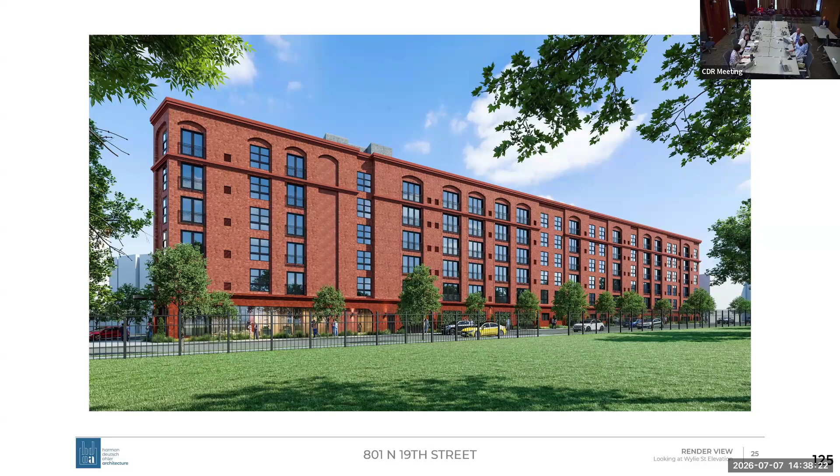Okay, is there still a vote on the comments? I don't know if we need to do public comment on this. Was there anybody on the public line? No, we don't have any hands raised. Just checking. Yeah, thank you - you came ready.

I think we just want to say we appreciate the staff comments and the thorough review, so that is our notes: great to see the solar panels being planned from the start, the ground floor is a challenge but the facade facing the park looks nice, please include the staff comments. Again, it's nice to see when our process actually results in additional conversations and candid discussions. So we appreciate it, thank you.